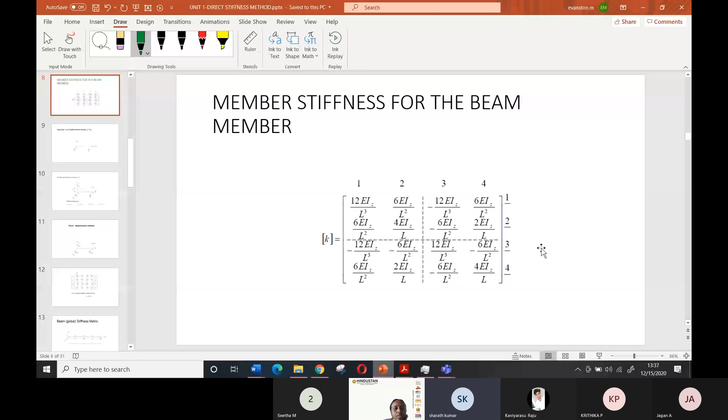Just to tell me whether you are able to see the slide share. You are able to see? Yes, ma'am. Okay.

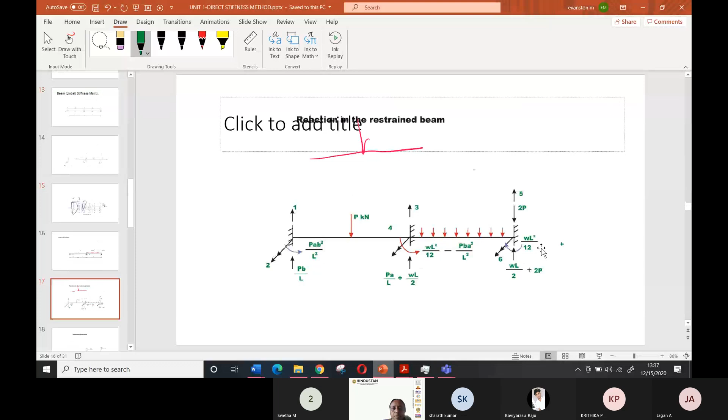So today, we have solved the problem and we have got the answer in the last class. U4 and U6 we have got it. So just as an introduction, Sharath Kumar, I'll tell you what you have learned so far in a fast mode.

This is, I will be teaching the direct stiffness method, and I think in BTech also you have studied structure analysis using the stiffness method. So here you will be studying how to find out the bending moment and the shear force for the continuous beam, the rigid plane frame, and the 3D rigid frame. That is your syllabus, the first unit. So we have covered the continuous beam, then the rigid frame and 3D frames have to be covered.

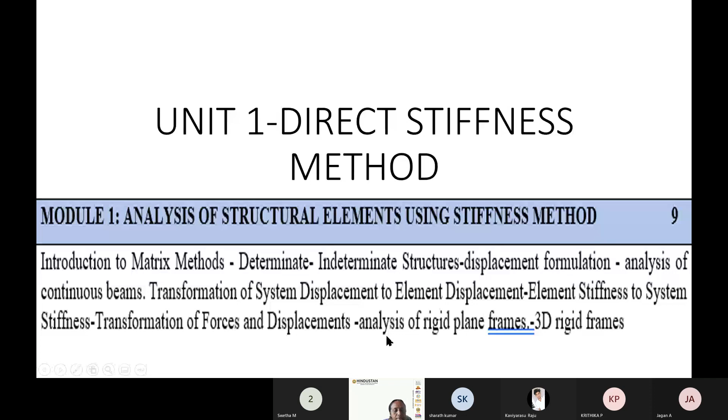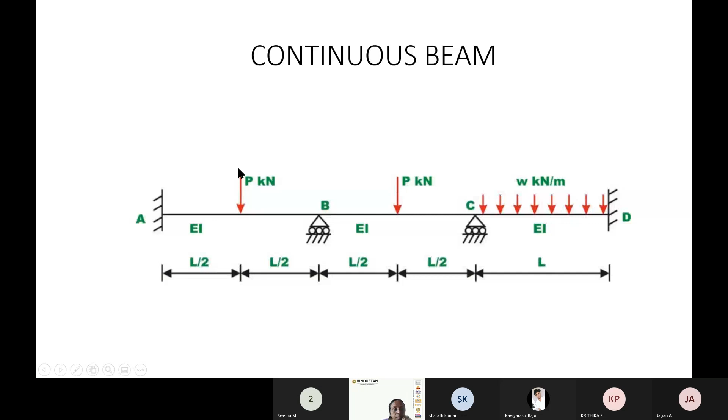So this is the continuous beam I've taken for the study, and when this is subjected to load, you have to convert this load as an equivalent joint load. So there are three types of supports: one is the fixed support, another is the roller support, another is the hinge support. That I didn't show here.

So fixed support, what is the nature of the fixed support mean? It will not have any rotation. That is the blue one, the navy blue one. It will not have any rotation, and it will not deflect also. At the end, it will not deflect.

It will not rotate. But what about the simply support? Simply support means you will have a rotation. You can see the rotation. Are you able to see the slide? You are able to see the slide, no?

Hello, somebody unmute and tell me. Yes, ma'am, yes ma'am, yeah ma'am, okay. Your volume is low, ma'am. Volume low, wait. Check it whether now also it is like this. Now it's fine or... Ma'am, now is it audible?

Not bad, okay. If it's a fixed support, then at the end support it will not have any rotation and it will not move in the vertical direction also. If it's a hinge, the rotation is allowed, but because the support is there, it will not deflect at the end. So these are the two quantities you have to know.

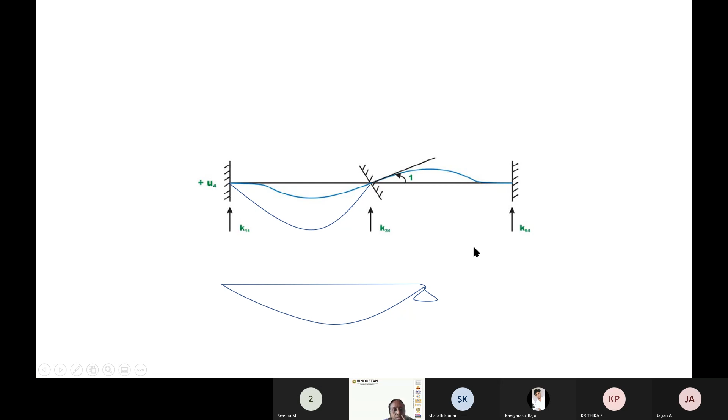And node numbering: when there is a beam, you have to number the beam. First thing, there is a 1, 2.

There are 3 members here, 1, 2, 3, and you should know the connectivity. The first member is connected with 1 and 2, the second member is connected with 2 and 3, and the third member is connected with 3 and 4. All the nodes you have to number.

After numbering the node, at each node you will have a vertical shear force and the rotation. Vertical shear force and rotation. So this is the thing.

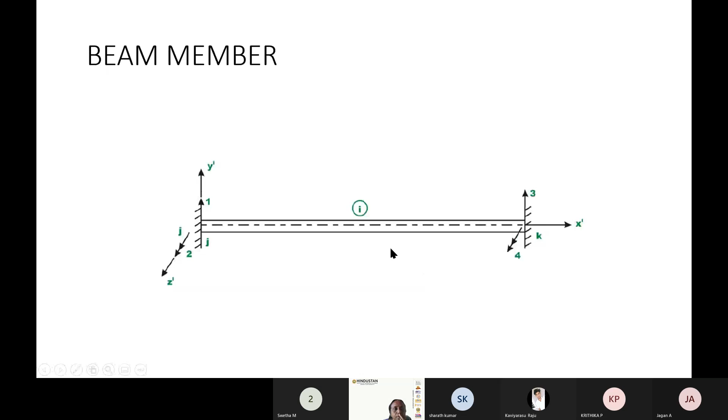Then we have to formulate the stiffness matrix that we have studied. That is, when you are applying a unit translation at the left end, what will happen to the forces? The shear force at this end will be 12EI by L cube, and the bending will be 6EI by L square. At the other end it is 6EI by L square, and the shear force will be minus 12EI by L cube.

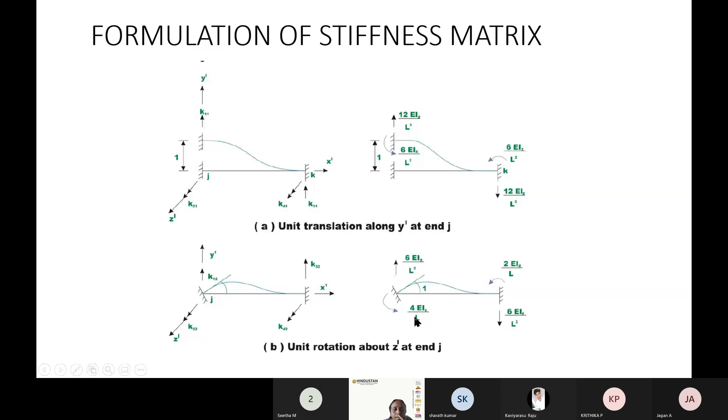Similarly, when you are applying a unit rotation at the end, what will happen to the forces? These are the forces: 6EI by L square, 4EI by L, 2EI by L, and 6EI by L square.

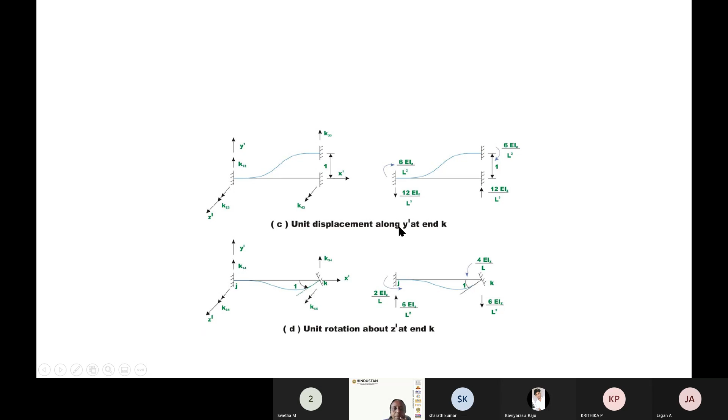Similarly, at the right hand side, if I am applying a unit force and a unit rotation, I explained what happens. So finally, whatever I have obtained, I put it in the matrix form: 12EI by L cube, 6EI by L square, then 6EI by L square, 4EI by L.

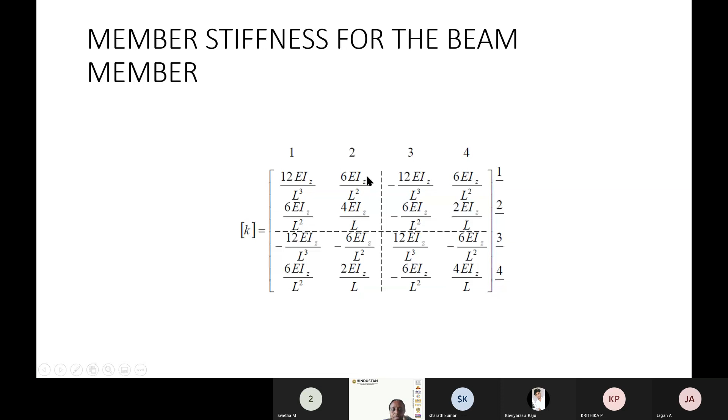This quantity you have to remember. This is just a repetition that will repeat here, and here, except this 4EI will become 2EIL here, 2EIL here, and 4EIL here. So this will be same as this one, and this will be same as this one. Only the sign convention, you have to take care of.

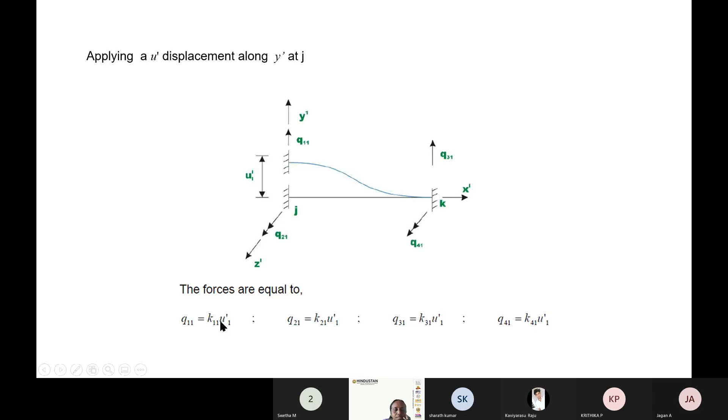So this is the stiffness matrix, and you know the equilibrium equation you have studied in BTech. That is, Q equals external force equals stiffness into displacement. This is the stiffness only, we have derived now, and the displacement is unknown.

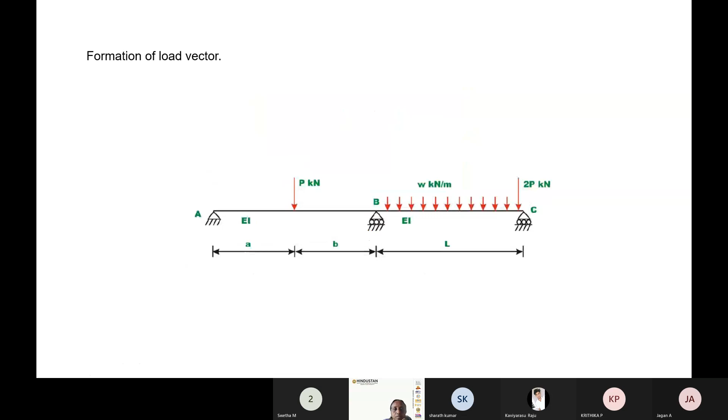Then we have come across the force displacement relation. That is, you have the loads, and this load you have to convert into an equivalent joint load. How will you convert it into an equivalent joint load? If it's a concentrated load, you will have a joint load of PAB square by L square and PB by L. This is a shear force and this is a bending moment. Similarly, at the other end you will have PA by L and PBA square by L square.

So these are the reactions, that is the forces acting in the downward direction. What I'm doing is just converting the vertical load at the junction, that is at the joint, into an equivalent load. So finally I am getting this answer.

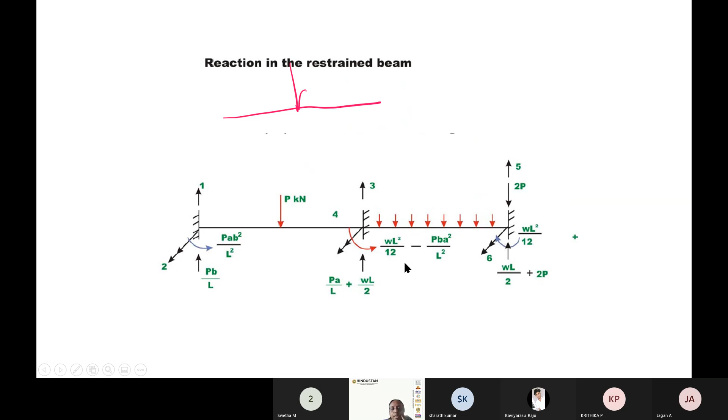And we have done a problem in the last class. This is the problem we have solved. First we formulated the member, the node numbering. Member numbering is 1 and 2. Then we have numbered the joint.

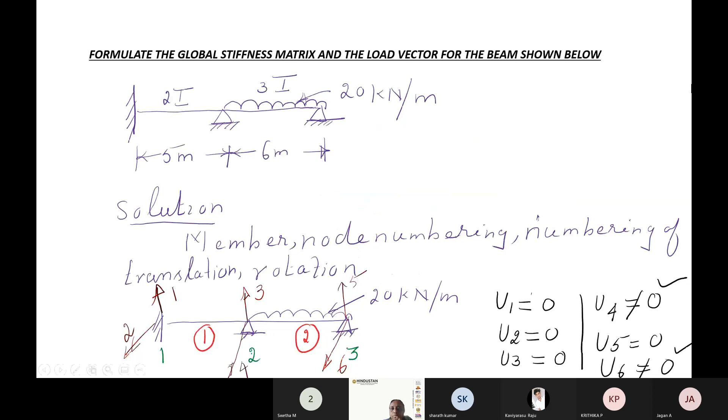Are you listening? Yes, ma'am. Sharath Kumar, I may be a little bit fast, but the concept alone I can explain because so many times I have explained it. So what you have to do is just learn from your classmates whatever we have learned so far.

So the concept is the formulation of the stiffness matrix and the load vector. This is the problem we have started solving yesterday. This is a beam, and this is a continuous beam. It has got, so you have to number the beam 1 and 2.

Then you have to number the node. Node numbering is 1. Wherever you are having the support, you have to number the node 1, 2, 3. So at node 1, you will have a vertical displacement and the rotation. And here also you will have a vertical displacement and rotation, that I have numbered as 3, 4. Here also vertical displacement and rotation, 5 and 6. So here when you are taking this support, it is fixed.

So U1 is equal to, that is the vertical displacement is 0 and rotation is 0, because it's a fixed end. Fixed end means there is no rotation and no vertical displacement. When you take U3 also, there will not be any vertical displacement, but it will rotate, because it is simply supported. Then U4 also not equal to 0, but U5, the vertical displacement, is equal to 0, while U6 will not be equal to 0. So whatever is not equal to 0, you have to keep in mind.

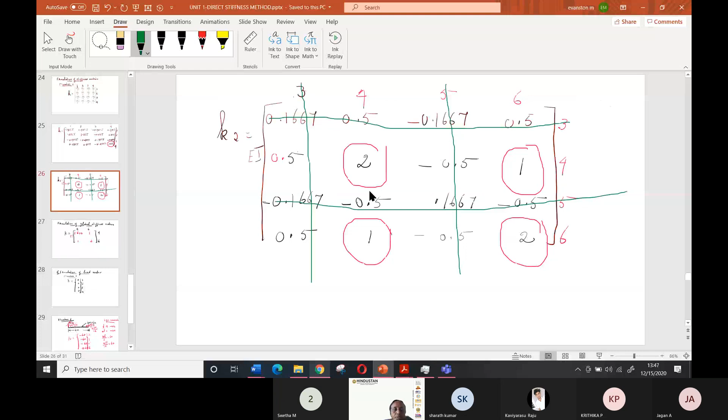Now we have to do the load vector formulation. When you look at this beam, the load vector for the first beam - there is no load, but the second beam has a load. You have to convert it into equivalent load. How to convert it? WL by 2 and WL square by 12. Here also WL by 2 and WL square by 12.

The sign convention I have adopted is downward as negative and anti-clockwise as negative. And why am I putting this downward? Because this beam has a 20 kilonewton load acting in the downward direction. That's why it will push the beam and make it sag, like a saucer, it will bend. So I have to put it downward, that is the purpose of this.

I'm converting the uniformly distributed load into an equivalent joint load. So when you apply the sign convention, you get minus 60, minus 60, minus 60, and plus 60. Numbering for the second member is 3, 4, 5, and 6. Similarly the load vector also has to be combined together. Finally what we want is 4 and 6 only, because U1, U2, U3, U5 are 0. So I left out all other quantities and took only 4 and 6 - this value and this value, minus 60 and plus 60.

So this is a static equation. Load, the external load, is equal to stiffness into U. External load is this one we obtained from here, and the K matrix also we obtained from the stiffness matrix, and then we have U4 and U6. U4 is the rotation and U6 is the rotation - the beam end will rotate. How much is the rotation? We have found out. So this is the equation, row and column you can multiply.

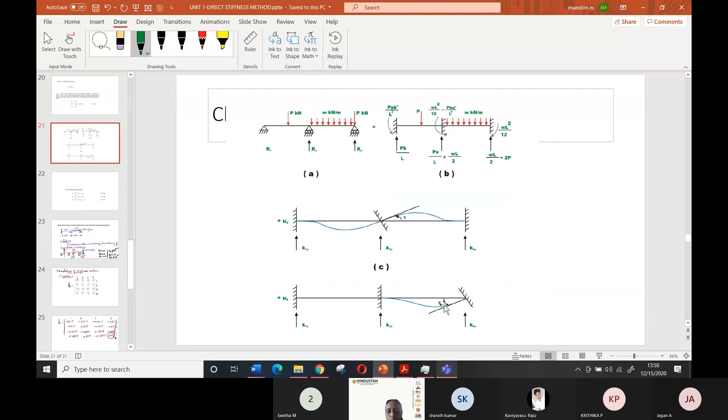So that's the concept - how much it is getting rotated. Rotate means, are you able to understand? This is the rotation. For the first member it is minus 29 by EI, and for the second member, U6 is equal to 44 divided by EI, which we have found out. Now we will move on to the formula to calculate the member end forces.

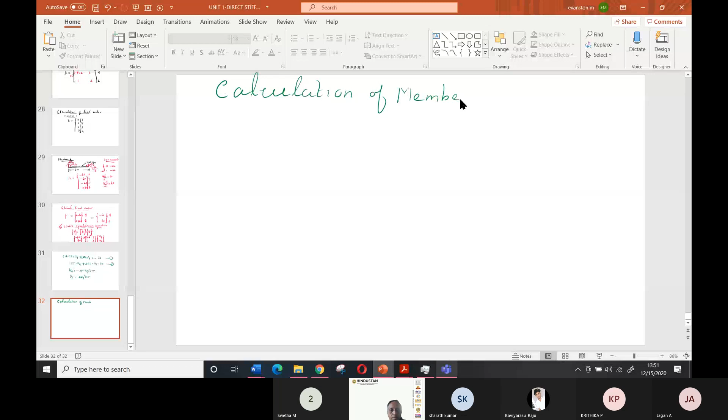Now we will move on to the formula to calculate the member end forces. You can write: calculation of member end forces. So number 1, we'll take the first one.

What is the equation? P1 is equal to K1, small K1... sorry, that is. You should not use the curly bracket because the curly bracket is for a vector. So we will write, if you want, you can have it in curly bracket, and square bracket is for the matrix, and U, capital U.

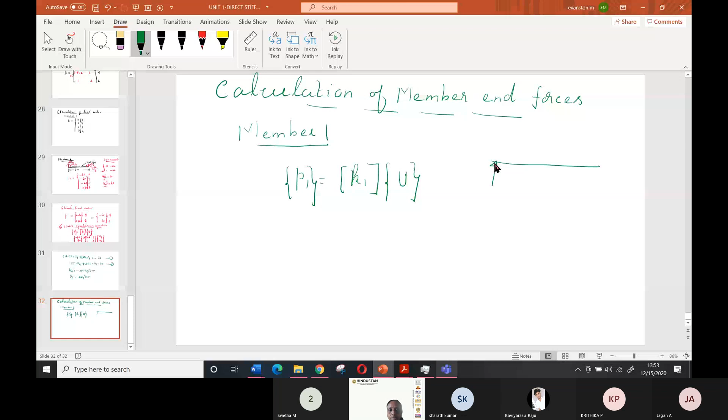So we know the value, now what we are going to do is find the member end forces - what is the force acting at the end of the member? This is the force acting at the end of the member, that is, there will be a resistance. Member end forces means how much resistance is offered by the pillar, the column. This force depends upon the load acting on the member.

So when you look at this question, there is no load on the first member, but there is some load on the second member. So for the first member, there is no load, so it need not resist anything.

If a load is there, then it has to give an upward resistance, and the load will be acting in the downward direction, and the moment will be acting. For example, because of the load, the moment will be like this, and the reaction - the load, in the vertical downward direction - is like this.

Vertical downward reaction is like this. So this downward load should be resisted by the upward load. This downward load will be equal to the upward load, and this moment will be equal to the anti-clockwise moment. So that we have found out already.

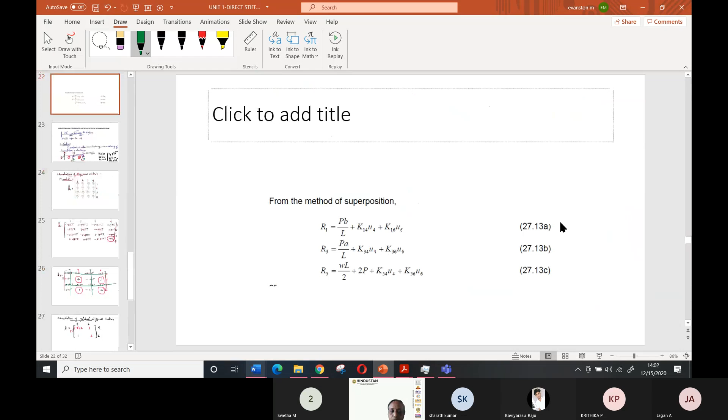So even if the load is not there, in the first beam you will have the rotation because of the second beam effect. Are you able to understand? One minute, stop. All of you stop and listen. This is what I mean is, even though there is no load here, this load will give us some contribution to this beam because this is supported at the junction. So that's why we are going to get the member end forces. Otherwise, there will not be any member end forces because this is equal to 0, the load is equal to 0.

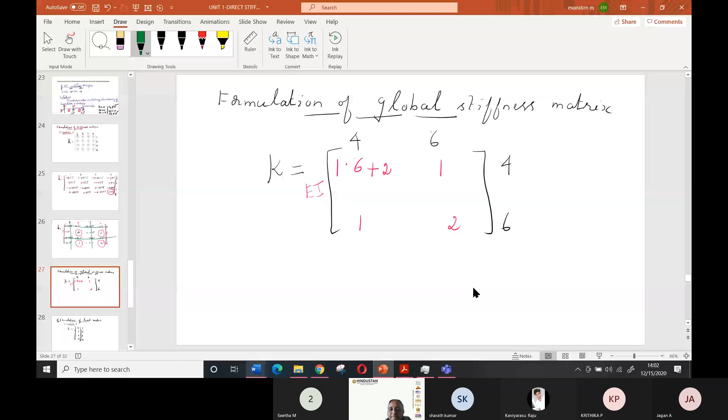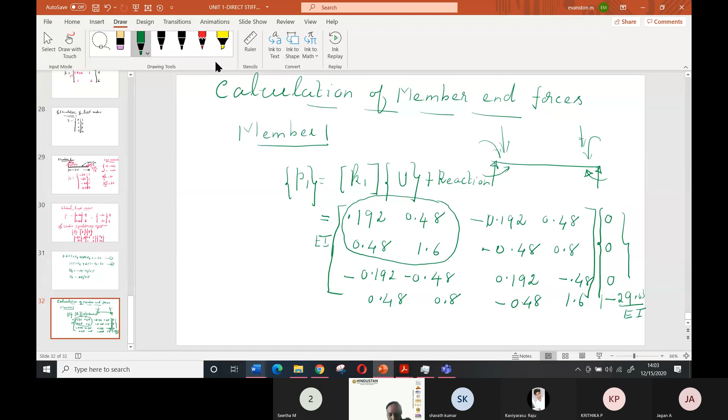Just multiply and tell me the answer. Tell me the final answer. If anyone has finished, just read it for me.

Can you tell me the answer for this? How much are you getting? Minus 13.93. 13.93, very good. Minus, wait, I'll also write. Minus 13.93. Second one is? Minus 23.22. Next one is? Plus 13.93. Okay, then next one is minus 46.4. So this is the correct answer.

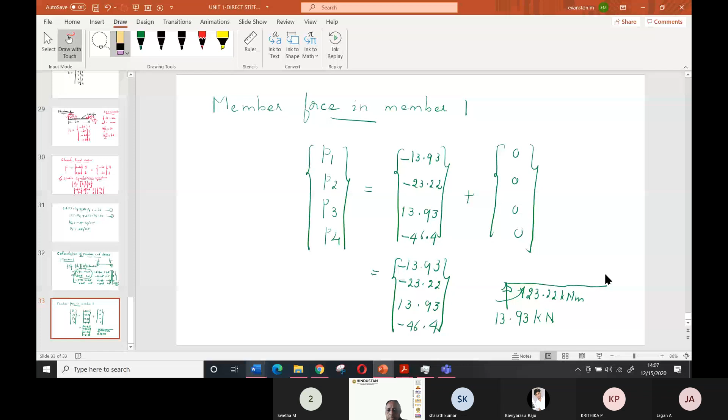this equal to, so it is acting down. Something is 13.9 is acting. .93, and this is 46.4. One minute. Okay.

So can you move on to the second member? Number 2. Can you do it for number 2? Ma'am, tell me, you told anti-clockwise means. Anti-clockwise is? Okay wait, I'm anti-clockwise positive. Okay so this should, sorry.

It should come downward, no? Downward is negative, so can you draw it? This I'll delete fully. And ma'am, for the first one, the arrow mark first one is downwards. Downward, yeah downward, it's correct. What you're telling is this is downward, and this one is, what about this? Negative means clockwise. No, so clockwise is negative. This is positive, positive means upward. Minus means this is the anti-clockwise one. Sorry, clockwise, clockwise is negative. So this is correct. This one 13.93 is correct, and this one is opposite direction. So just make it reverse and do it.

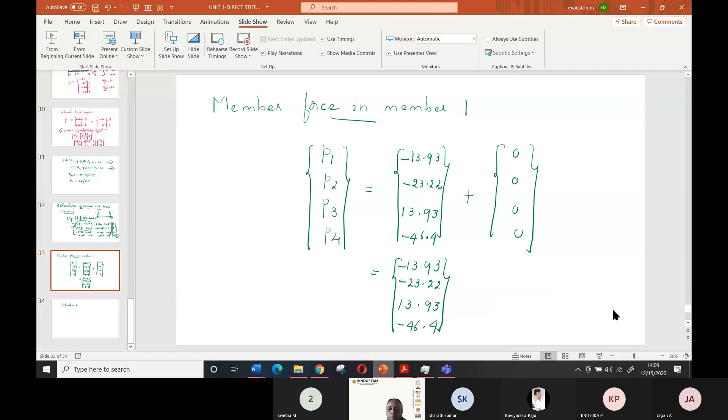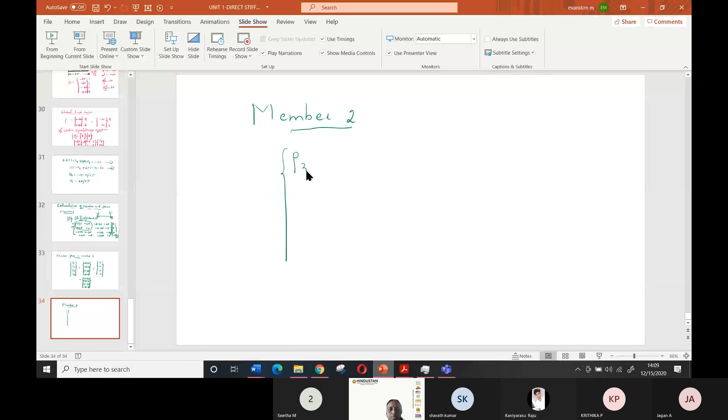Now we will move on to member 2. What are the member forces? It starts from 3, 4, 5, P6. So what is the member force equal to? 3, 4, 5, 6.

So this is U3, U4, U5, U6 plus reaction. What is the reaction? What is the reaction you will have in the opposite direction? That is, the reactions will be...

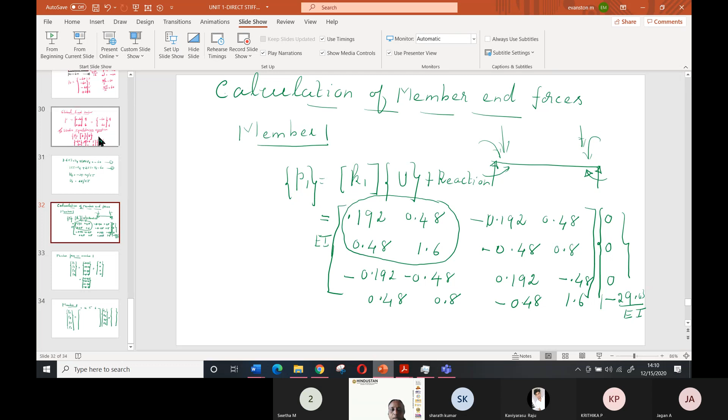This is because of the load. The reaction should be in the opposite direction. So the reaction will be plus 60, plus 60, plus 60, minus 60. So otherwise, instead of writing here as plus, I will put minus, because minus of minus will become plus. Are you able to understand?

That is, you are having minus here, but I have to make it plus. How will I make it plus? Minus of minus — if I take the minus outside, then it is plus 60. Because this is acting downward, the reaction should be upward. This is clockwise, and the reaction should be anti-clockwise. That's why.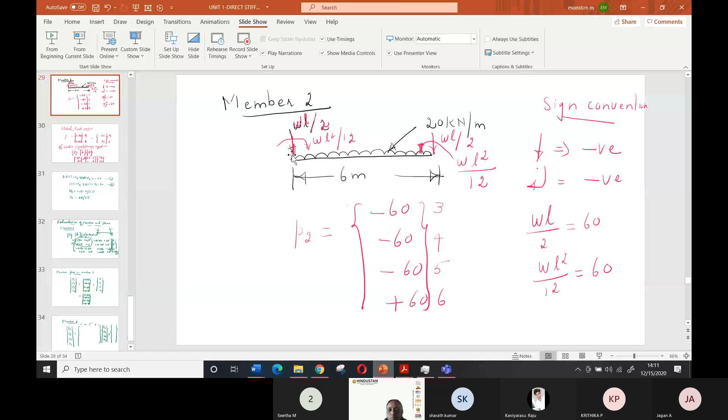Here either I can write, or I can make this as minus, but you should not confuse with it, because we have already done it. So if you want to cope up with that, you have to make it as minus, and then you can write the same as what you have already found out. The same sign convention you can use: minus 60 and plus 60.

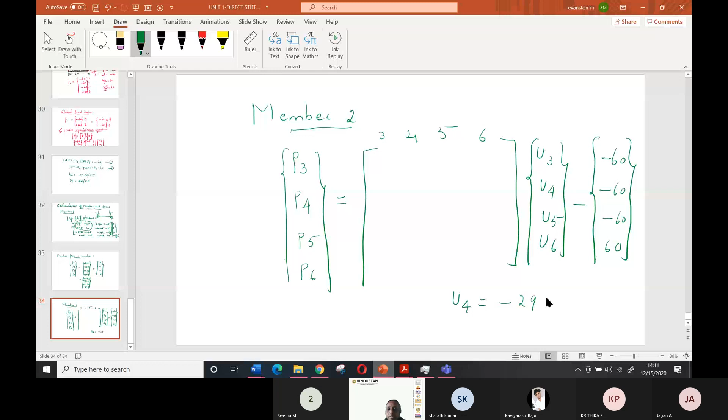Can you do it? And here, what is the value of U4? U4 is equal to minus 29 by EI, and U6 is equal to 44 divided by EI. Can somebody tell me the value of 3 here? Can you read it, the value for the second member?

0.166, 0.5, 0.5, minus 0.166. Then this one: 0.5, 0.5 — this is 0.5, 2, minus 0.5, minus 1. 0.16, 0.5, 0.5 and 2. But the sign, ma'am — minus 0.16, minus 0.5, then positive, then the last one is minus 0.5, ma'am.

Okay, here it will get 0.16 and 0.5. This is minus 0.5. Yes ma'am, minus 0.5, then this is 1. Okay, you multiply and tell me the answer.

Substitute the value of U4 equal to 29. Am I correct? U4 is 29 only, no? Ma'am, 0.5, last row: 0.5, 1, minus 0.5, 2. Oh, 2 — this is 1 and this is 2. Okay, do it. Multiply and tell me the final answer. I want the force P3, P4, P5, P6.

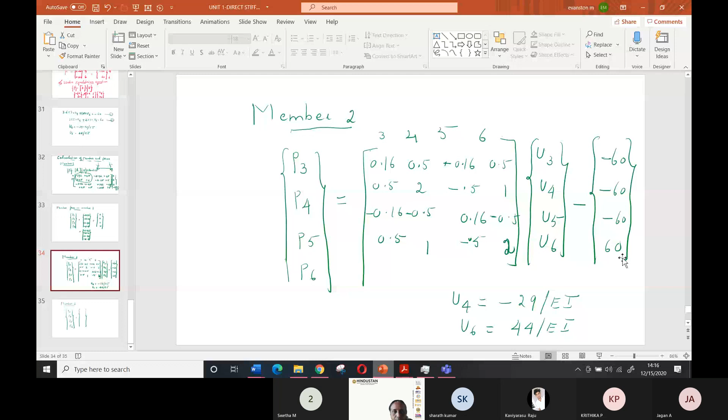Multiply, fine, then add this with this and tell me. 67.5 — plus, that's the correct answer. 67.5, that's correct. Second one: 46.44, ma'am. 46.4, that's correct. Then 52.26, 52.2. Last one? 0. Can anybody tell me why it is 0?

So what does this P3, P4, P5, P6 indicate? P3 is the vertical force, P4 is the bending moment, P5 is the vertical force, and P6 is 0. Why is it 0? Can anybody tell me why P6 is equal to 0?

Hello? When you look at the diagram, then you will understand. All of you are able to get this answer? Yes, ma'am. Yes, ma'am. Go to this diagram.

When you go to this diagram, you will see this is a fixed support, so you will have a resistive moment. This is a hinge support here, this moment will be counteracted by this one, and here there is no moment. Am I correct? It's a simple support. At a simple support there will not be any moment. That's why you are getting P6 equal to 0 — because it's a simple support. But here you will get a moment because it's a fixed support. So wherever you have a fixed support, you will have a moment, and wherever you have a simple support, there will not be any moment. That's the concept. Okay.

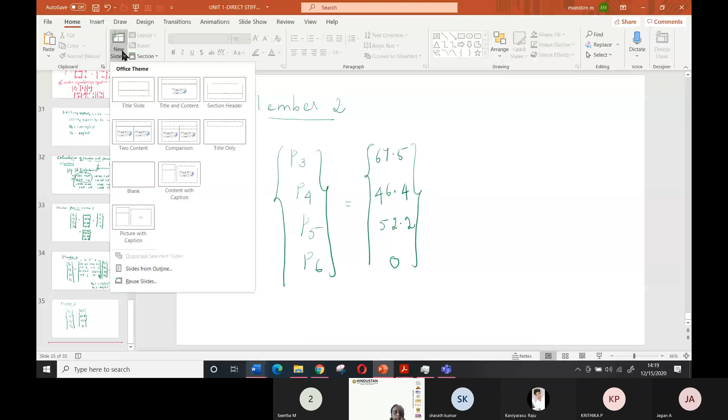If you understand this concept, then the first unit will be easy. First and second unit will be easy. So I'll write the question.

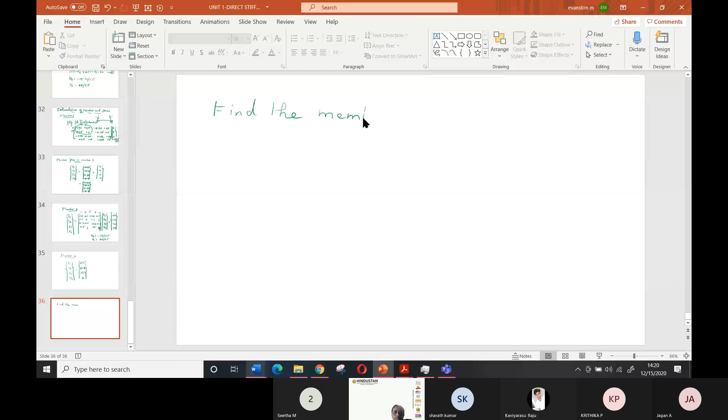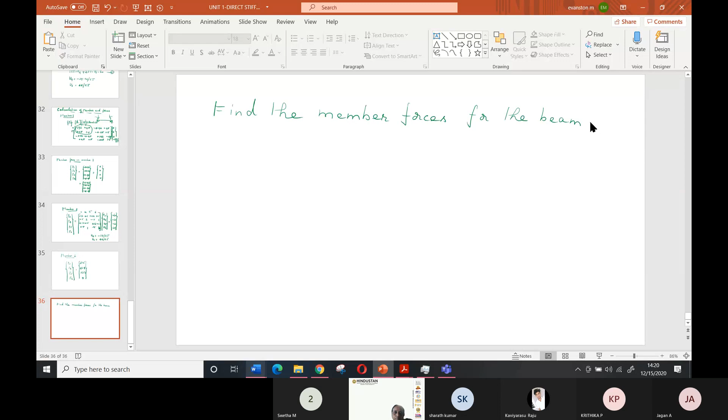Find the member forces for the beam shown below.

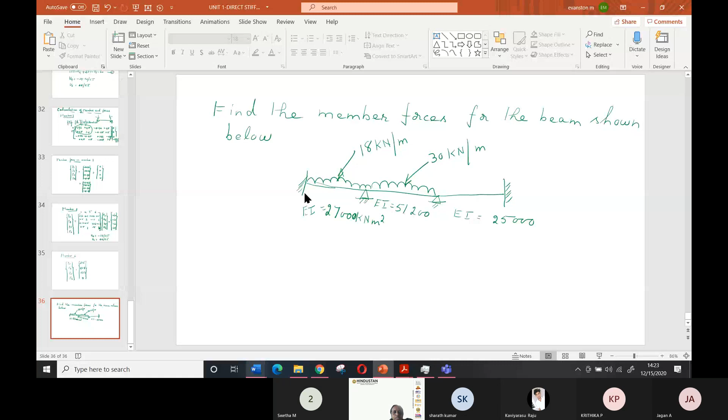Distance, no? The first one is 6 meters. The second one is 8 meters. The third one is 5 meters.

Can you start doing it now? 25,000, 51,200.

First, you now mark the member forces. Member force, the member number. 3 members are there.

Start doing now itself, we have got 5 more minutes. First start with the member forces, because this has 3 members.

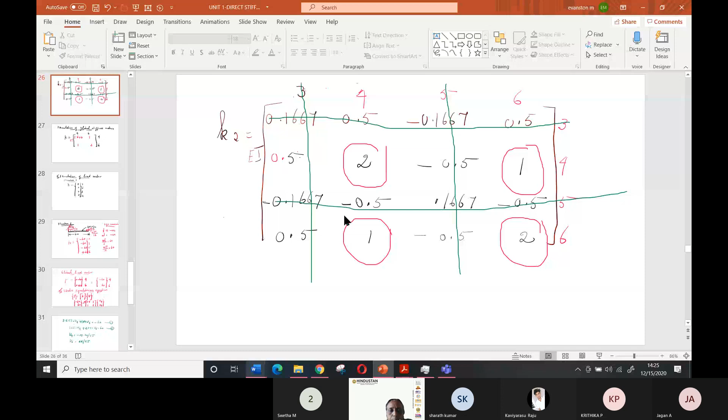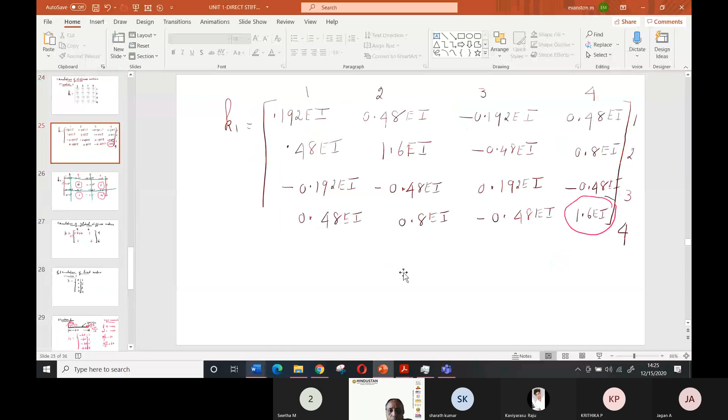You can even take this from my notes, but it's not possible because it's in image form, picture form, so you won't be able to take it. So this you type, you can do it. These values you can type. This global stiffness matrix, everything you can type. This also, this load vector, this one.

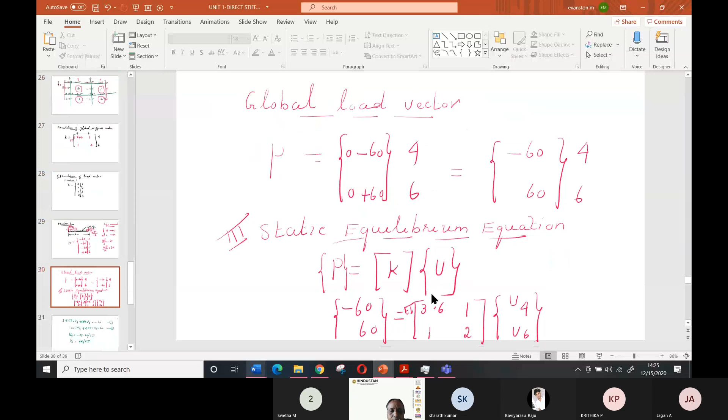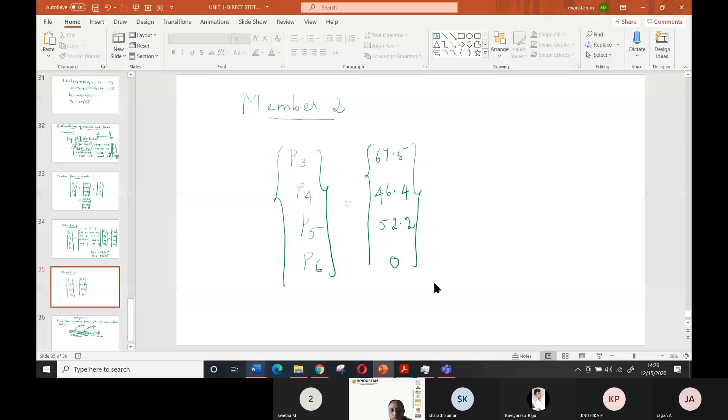Then equations, all of it, you need not type. The final answer, just type it. So everything type it. Diagrams you may not have the option for AutoCAD, so you can draw it by hand and type it, take a printout.

It's not possible, no. So what you'll do is just upload your handwritten notes, because you may not have the facility, you'd have to go outside, so I don't want to trouble you. Write with your own handwriting in a paper, and you can upload it. I'll tell you how to upload it.

Just do it and come, we'll discuss in the next class, then we can upload it. Just mark the member numbers 1, 2, 3, and the node numbering also.

Morning, full all are present. Morning, all are present, all the 7. Yes ma'am, okay.

Start doing. If you are having any doubt, ask me. EI, note it down, EI values given, it is different. Start doing now.

Any doubt in this one? Numbering - can you guess what is the numbering for the global stiffness matrix? Can you tell me? Somebody can tell me. Global stiffness matrix numbering.

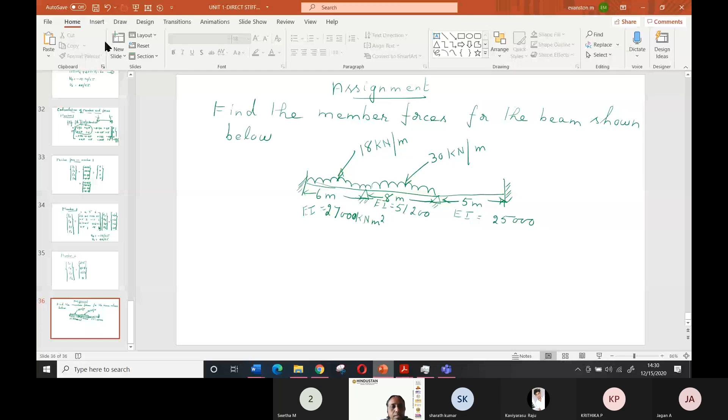Sorry, one more correction in the question, all of you note it down. One more correction in the question. This end is not fixed, all of you make this correction. This end is hinged. Again, it's a hinged end.

In that case, who was answering? Jagan or Kaviyarasu? Kavi, Kaviyarasu? Yes ma'am. Kaviyarasu, what you told is correct. If it is a hinge support, then 2, 4, 6 is correct. Actually the question is hinge support only, so that I can check the answer, so make it a hinge support and do it.

So it's a 3 by 3 matrix. I think 3 by 3 also you can solve in your calculator, Swetha, 3 by 3. Yes ma'am, we can do it now. Do it now, okay, up to how much can you do? 3 by 3 only. Yes ma'am, 3 by 3.

So you can just solve this problem using your calculator, and you have got a 2 day break, you can do it at home, and the assignment you have to submit, that carries marks. Every internal assessment I will consider for your marks, continuous assessment marks I will consider.